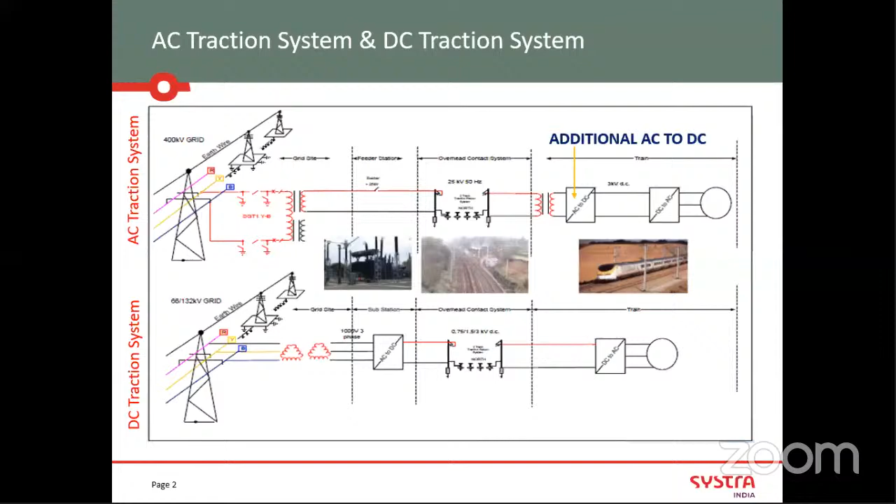There are AC traction and DC traction. In AC traction, Indian Railways uses a 25 kV AC system. And the most important thing, there will be overhead electrification. That means there will be a mast, and there will be a pantograph on the train which will be connected to that.

And there is DC traction. DC means there are certain voltage levels used by third rail, I will not go into that detail. Just for understanding, electrically there is an AC system used in Indian Railways which has to be on the mast and overhead. Over the train there will be electrification work. There will also be DC electrification, which will be at these voltages, and there will be no mast for this.

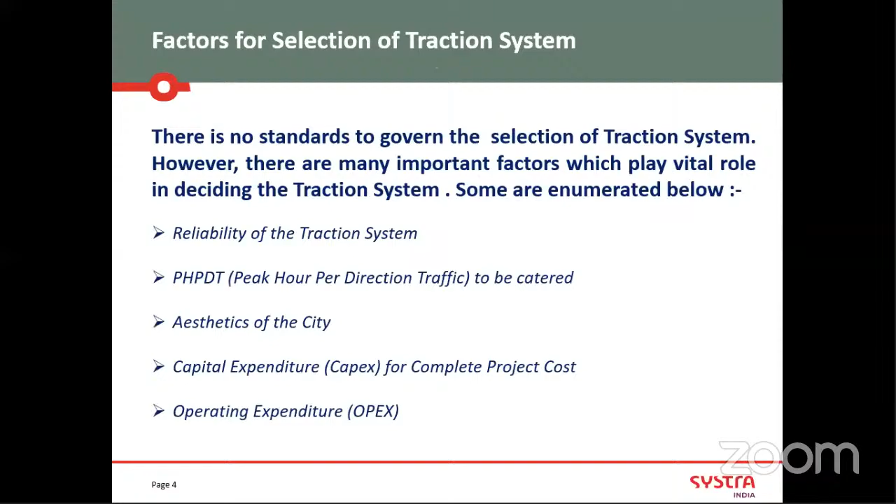At this moment I would like to share a video, made by Mumbai Metro. Let me know if it is visible... Yes, it's visible, and you're getting audio also.

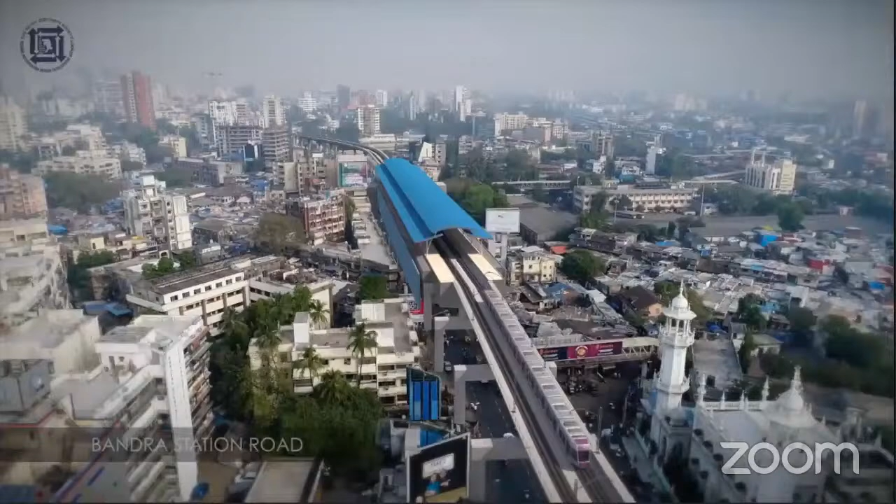I would stop here a bit. These are the kind of towers which we call mast, and there is power supply going on through them. For electrical students it's very important to know that all these things are designed by electrical people like us. What we design on paper is built and presented here. It is very good to see when we do these kinds of works, we are very happy to see it implemented in the real world.

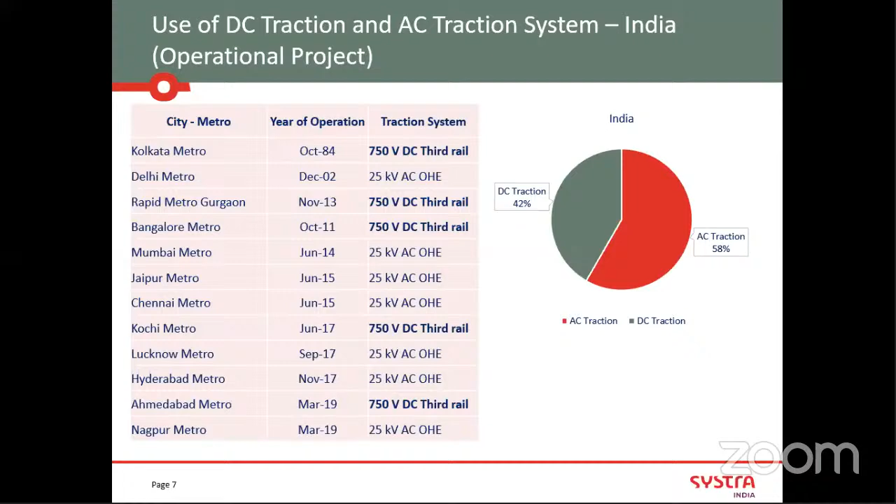Moving ahead, I will not be too technical since not everyone will be happy with that. I'll let you know what kind of work my company, Systra India, being a technical consultant, is doing. We are involved in feasibility studies - an initial study where, from the electrical engineering point of view, if given a project where a metro has to be started somewhere, we study how much power and electricity is required, how we will distribute those systems, and everything has to start from scratch.

That is as a feasibility study. Then the aspect when the system is being built, like Delhi Metro or Bangalore Metro, when the client is ready to start the works, then we do preliminary design and detailed design. Preliminary design in the sense that we do all the calculations.

If you are in 7th semester, I think, then you would have studied transmission, distribution, control, protection, earthing, and many things which really apply in the practical world. So here we go to the basics and we start from scratch, we study, we prepare. There are so many things which we can include here. So that is a part of design, where we prepare everything that is being implemented.

And one more aspect which we deal with is the detailed project report. This slide is related to the detailed project report. When we prepare the detailed project report, we study how much traffic is there in that area or how much is required. Those are technicals, let's not go there.

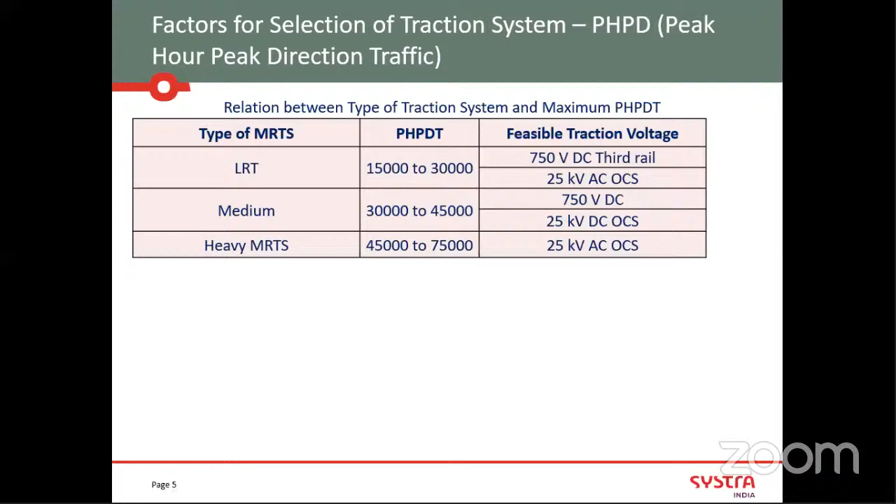So basically, before starting any project, we have to provide a project report: whether it is feasible, these many stations are going to come, these are the systems, this is the costing. So not only the technical part, sometimes we have to look into the commercial aspect of our job also. So it is a mix, best of both worlds you can say. You do technical, you do commercial, and if you are interested, you can go into the commercial part also. So there are many fields, and these are the things being done in our company.

And one more thing I would like to add: in preliminary design, we do simulation study. I think you all will be aware of ETAP, because when we were in college, we used to do ETAP projects also. Still after 10 years, I'm using ETAP with what we learned in college or what our teachers have given us. ETAP is a software which you will use after many years also, and it is very satisfying, because in college we wonder whether it will be applicable in future or not.

But let me tell you, from 10 years of experience, whatever you are learning in college, the basics will always be with you. Maybe you will be doing something else, however, the basics will be the same.

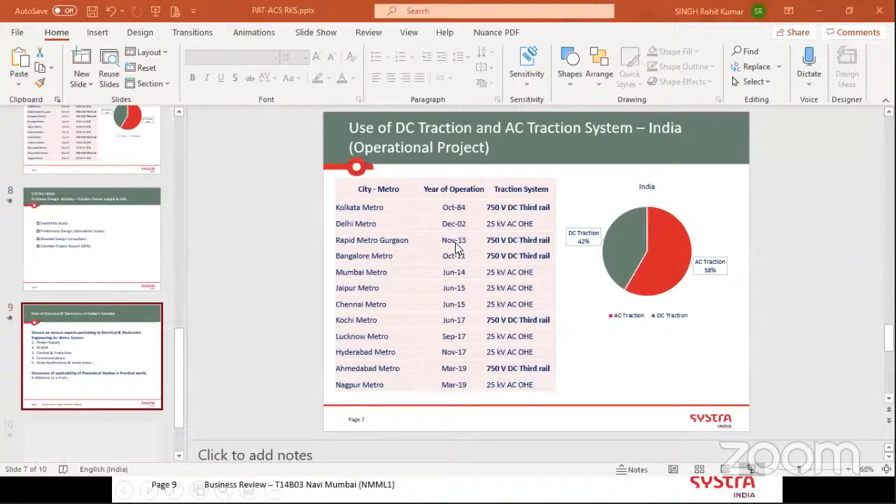So I would like to show one more video that is basically not electrical, but when I first started working in metro jobs, I was very happy to see that animation. So I will just show this video.

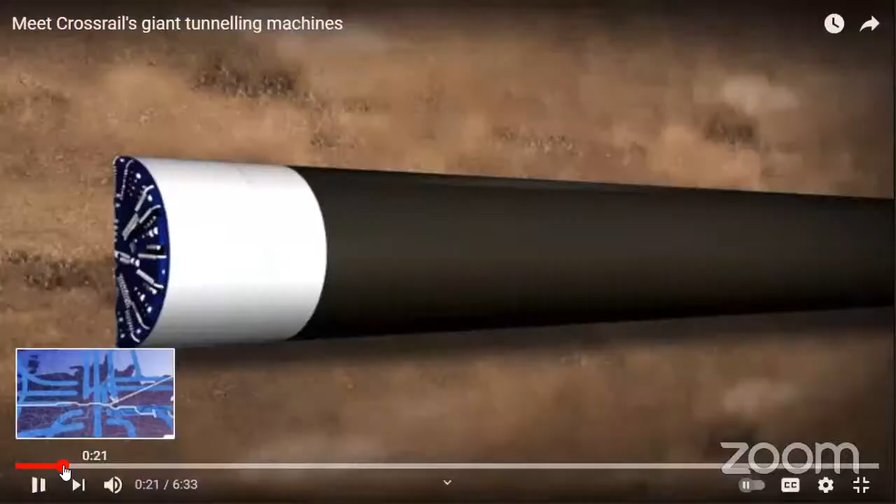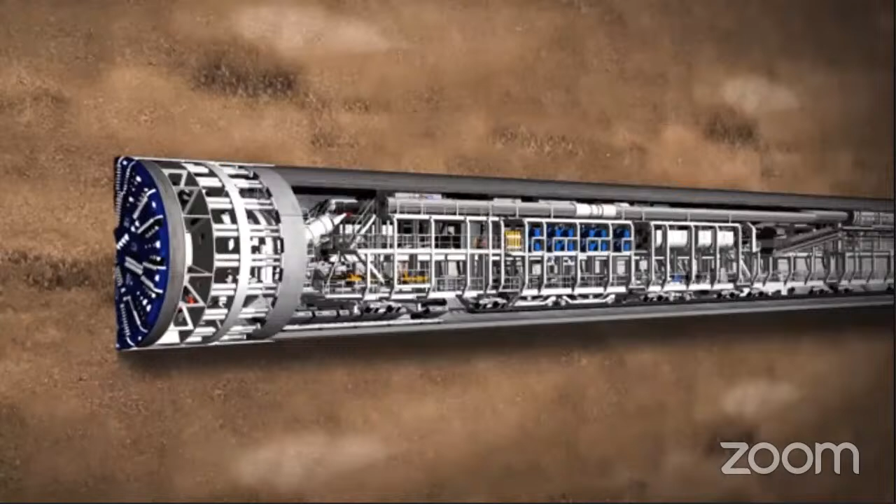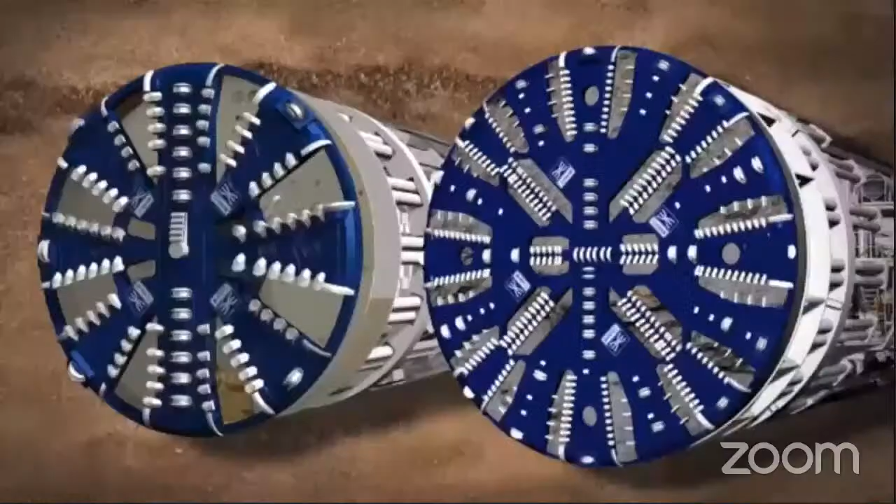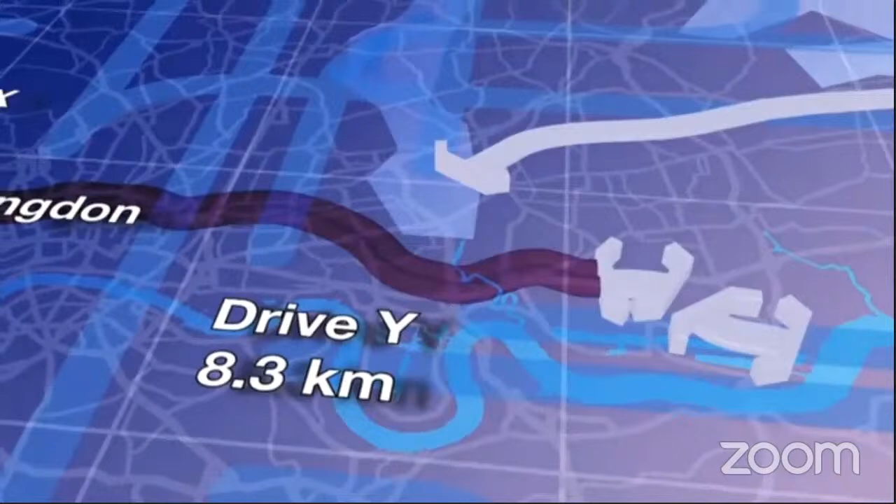When it opens in 2018, Crossrail, 8 tunnel boring machines or TBMs will drive through the ground to create Crossrail's tunnels. A TBM is 148 meters long and weighs 1,000 tons. This is the equivalent of 14 London buses end to end and a staggering 143 buses in weight. It has a rotating cutter head at the front and a series of trailers behind housing all the mechanical and electrical equipment. There are 2 types of TBM being used by Crossrail: earth pressure balanced TBMs and mixed shield TBMs. 6 earth pressure balanced machines will be used for the 18 kilometers of tunnel through the clay to the west and the riverbed deposits in the east, while 2 mixed shield machines will drive the tunnels through the chalk beneath the River Thames. Depending on the geology below and the buildings above ground, each TBM will travel between 90 and 150 meters each week, ending up within a millimeter of where it needs to be.

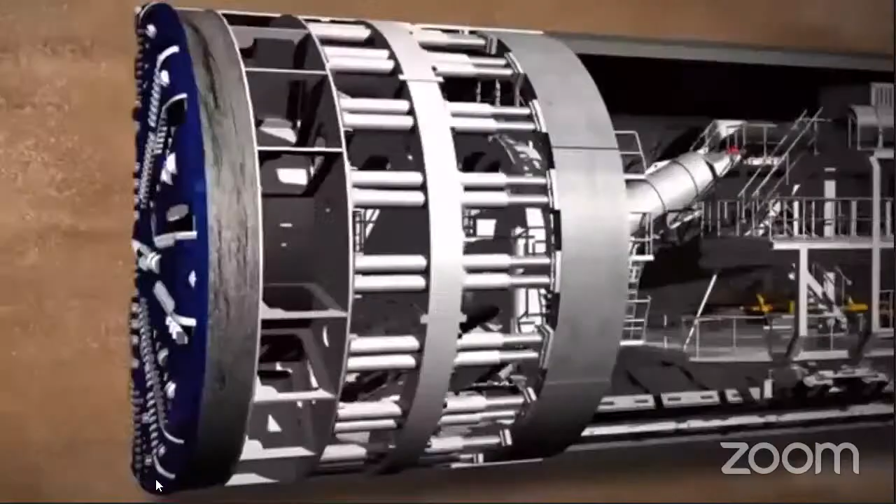Sir, audio is there, na? Yes, sir.

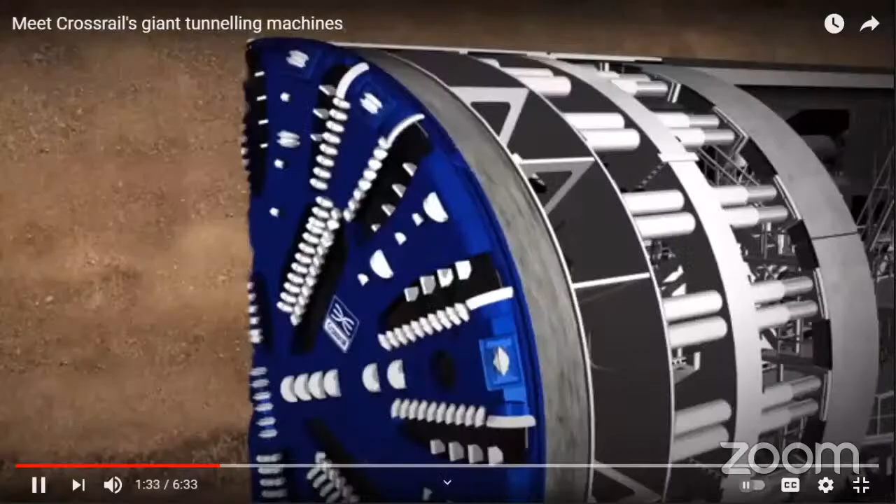The first part of the TBM's work is the tunneling phase. The earth pressure balanced TBM has a cutting wheel which is pressed against the tunnel face by hydraulic cylinders. Inside the cutting wheel, the disc cutters and scraping tool loosen the material. If the earth is unstable, to stop the tunnel face collapsing or digging too fast, the TBM uses the soil that has already been dug out by the cutting wheel to support the tunnel face.

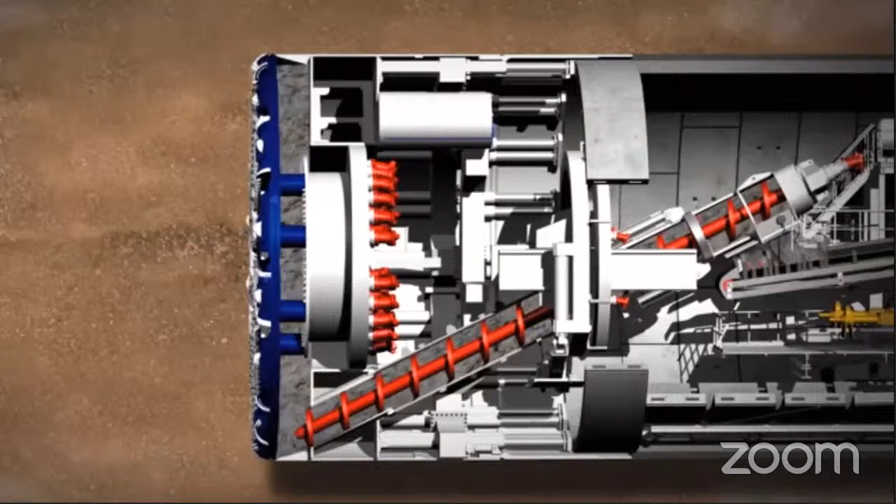This creates a stable environment for the tunneling to move forward. The tunnel face is continuously monitored by pressure sensors. They check the turning power of the cutting wheel and the screw conveyor, and they also keep track of the material that's been excavated. The material is then taken away on conveyor belts.

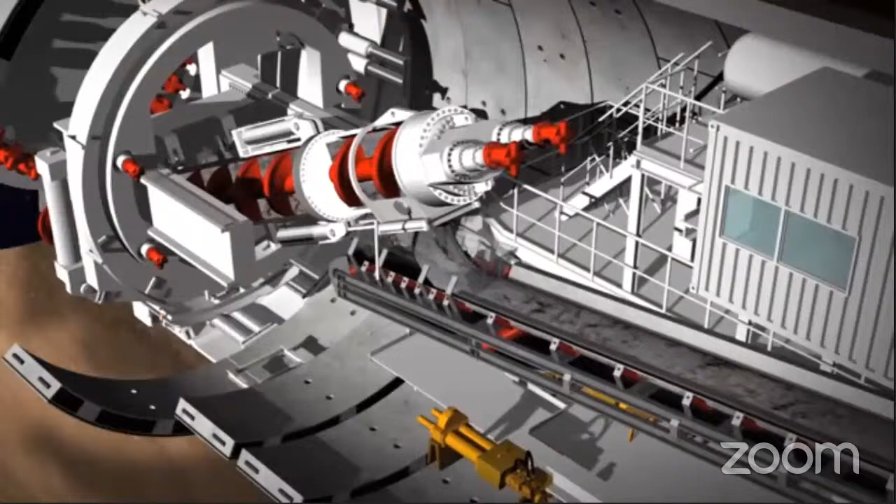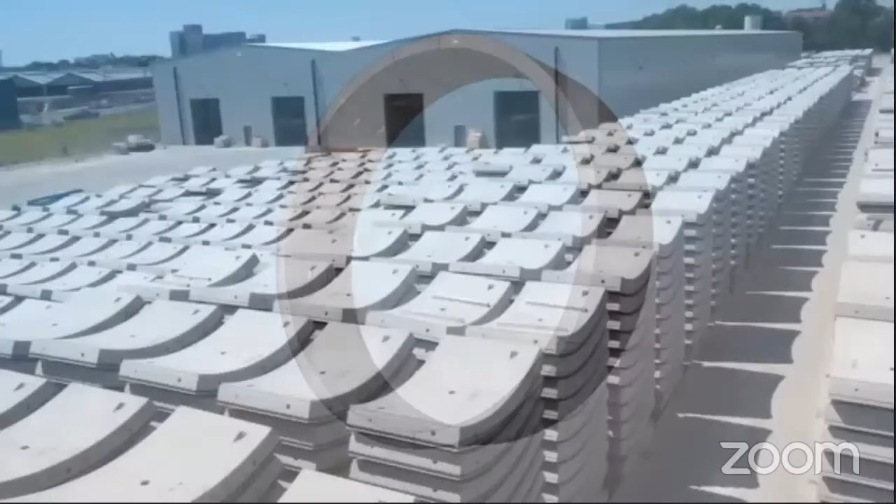Once the tunneling phase is done, the cutting wheel and screw conveyor are stopped and the ring building phase starts. A complete tunnel ring consists of several lining segments made of pre-built reinforced concrete. These are made in a special factory above ground. They must match the exact size required and are taken into the tunnel on flatbed rail cars.

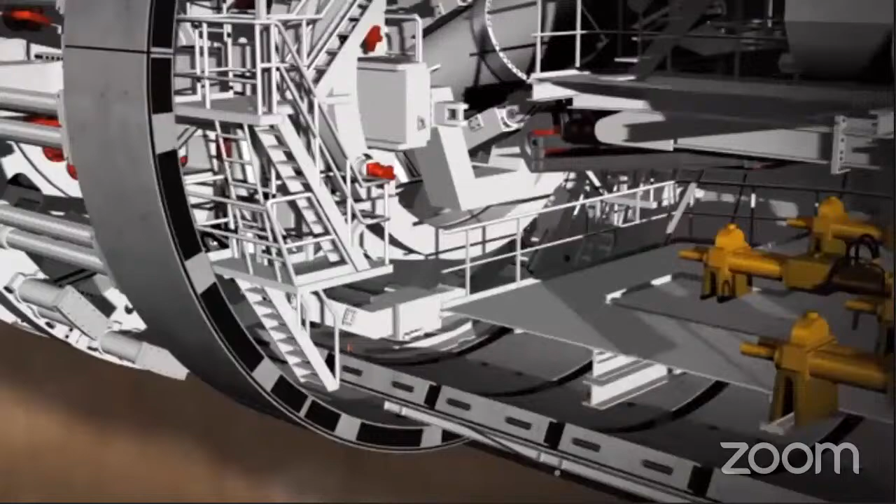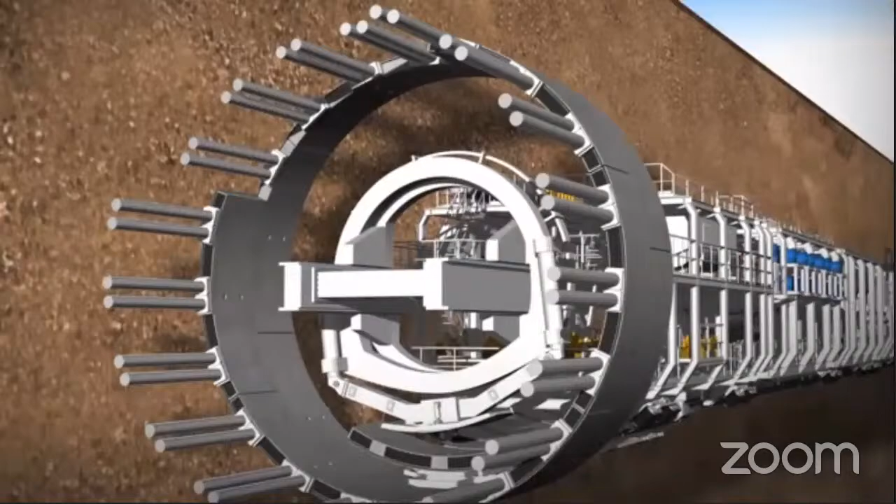The concrete segments are fed in by the segment feeder and lifted into place using a vacuum. The hydraulic cylinders are temporarily retracted in order to provide enough space for the new segment. The segments are positioned with millimeter precision and held in place by cylinders before being finally bolted into position. The conical keystone is put in from the front to complete the lining ring.

Each individual tunnel ring is built in a slightly conical form. This means that curves can be built along the tunnel route by changing the direction of the cone. The hydraulic cylinders are extended again to secure the segment into position.

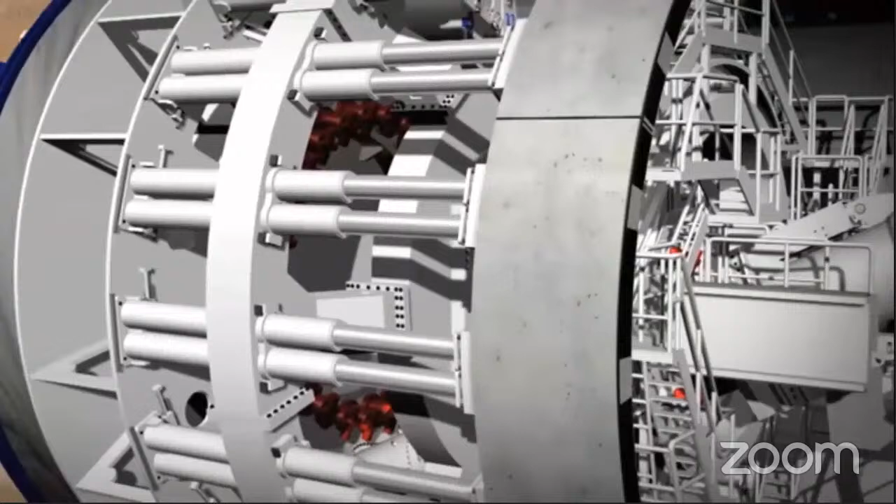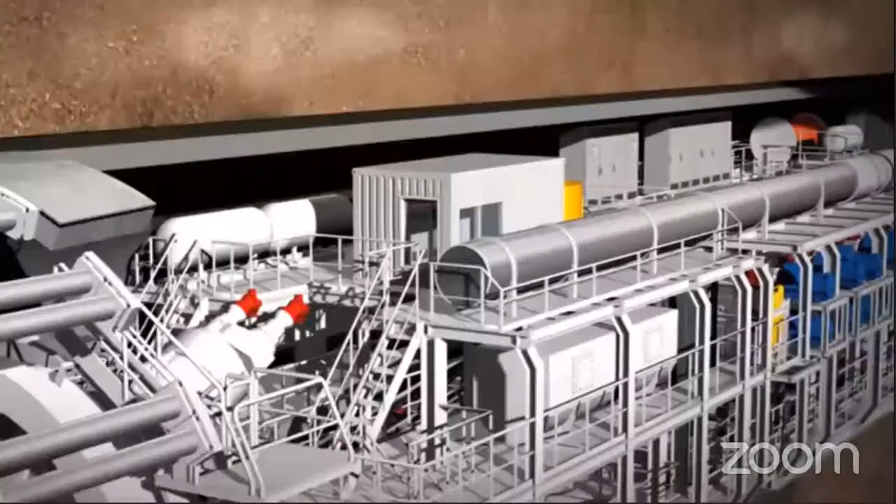During all this work, the people and machines are protected by the shield skin from the saturated ground where water is under pressure. All the readings are displayed on monitors in the central control cabin and fed back to the machine operator. Once each section of ring building is completed, the next tunneling phase can start.

The mixed shield TBMs dig in a different way to the earth pressure balanced TBM and will be used for tunneling in waterlogged conditions such as below the Thames. Mixed shield TBMs use bentonite, which is a slurry of clay and water, to support the excavation face and act as a suspension medium for excavated material.

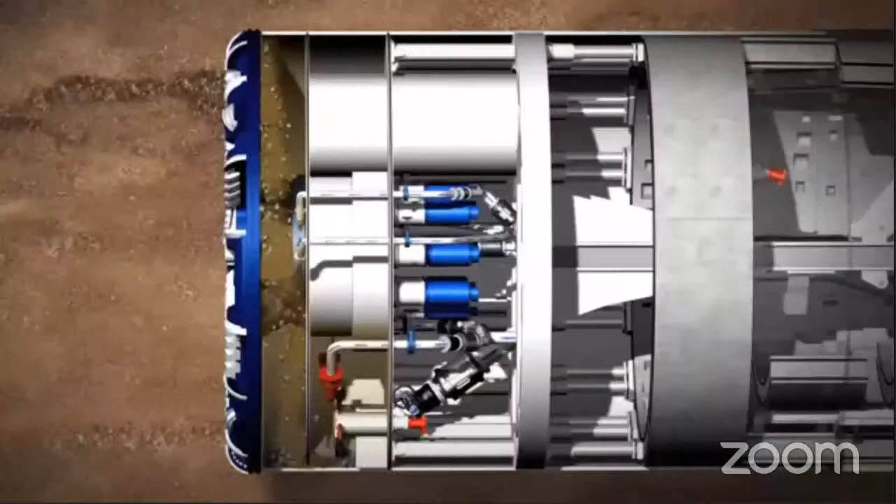The excavation chamber is behind the cutting wheel and separated by a submerged wall from the working chamber. The excavation chamber is completely filled with bentonite and the working chamber is approximately 2/3 filled. The two chambers are connected in the form of communicating pipes via an opening in the submerged wall.

A filter cake is created ahead of the cutting wheel by pressurizing the bentonite in the working chamber with compressed air. The bentonite penetrates the ground to form a membrane which holds back water. Changes in the soil can be handled by adjusting the pressurization.

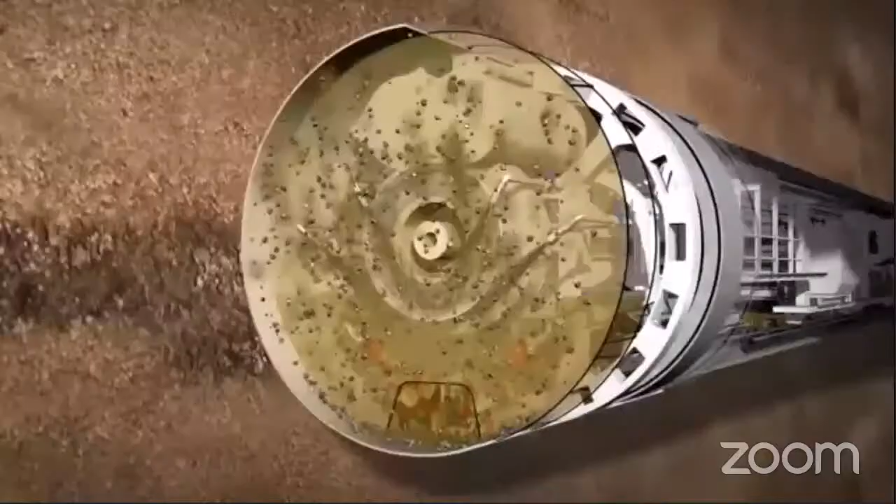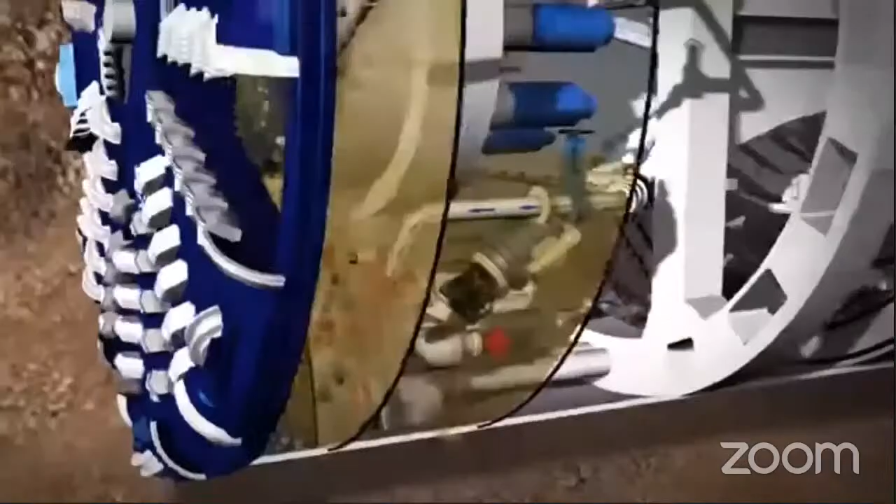The dugout material falls into the excavation chamber. Small grains are dissolved into the bentonite and bigger stones and debris fall to the bottom. Flushing nozzles guarantee smooth removal of the excavated material. The excavated material is pumped through the suction line to the separation plant at the surface.

Here, the soil is separated out and removed from the bentonite suspension through a centrifuge, and the clean suspension is transferred back into the slurry circuit. As tunneling advances, the flexible extension lines are installed to extend the lines after each thrust phase.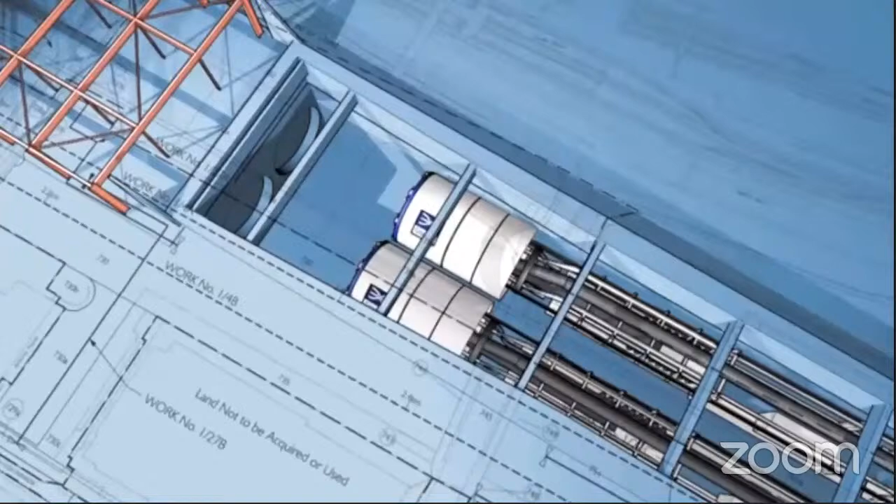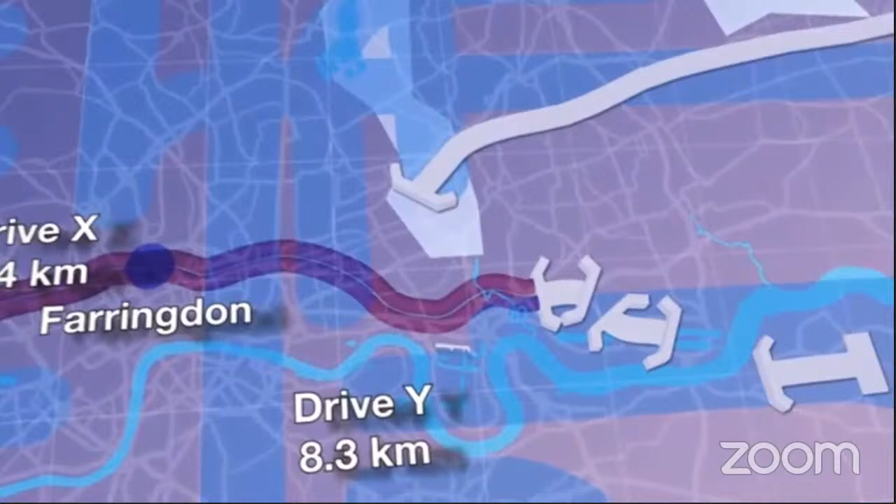Crossrail's first pair of TBMs, Phyllis and Ada, will construct Drive X, travelling from Royal Oak to Farringdon. A second pair of TBMs, Elizabeth and Victoria, will construct Drive Y, starting from Limmo in Docklands and heading under central London to Farringdon. A further two TBMs, Mary and Sophia.

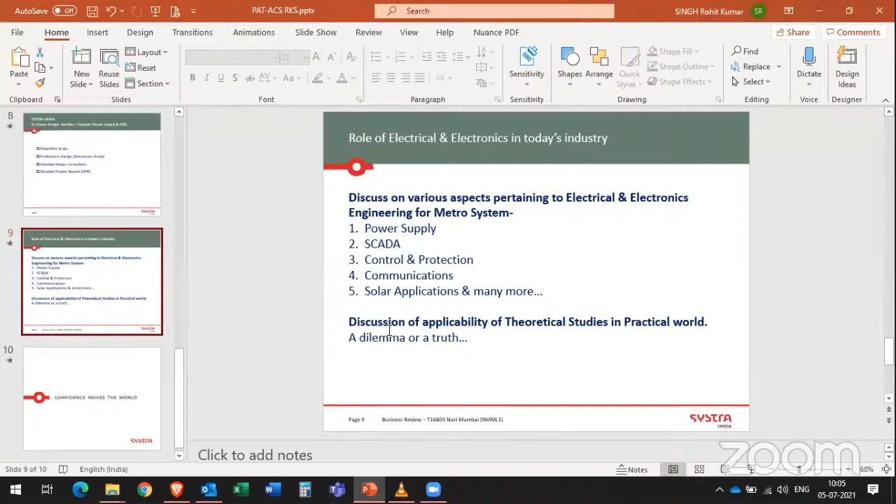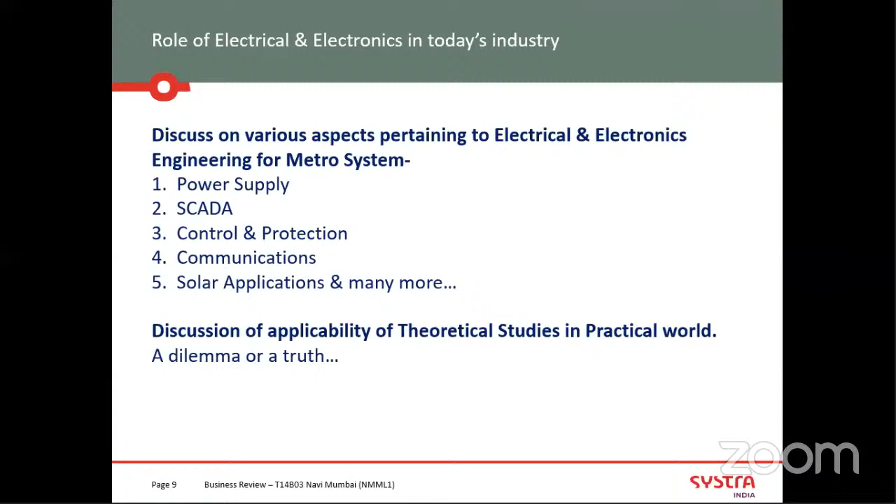So I understand that this is not related to the electrical aspect. However, it is very interesting to see what things are being employed in constructing the metro, and especially an underground metro. The one thing I would like to add here, being an electrical engineer, we think that we'll be dealing with electrical aspects only even after completing our degrees and going to work.

But the most important thing we learn here is working in a group as a team with various other aspects of engineering. Like we have to deal with civil engineering also. Over a period of time, we have to understand what civil engineering is, what things are related to it and how it will interface with electrical, because civil, electrical and mechanical, these three aspects

go hand in hand. If you are in any job, if you are doing any work related to electrical, be it any field, be it in power plants, substations, metro, or solar, anywhere you go, there will be aspects where you have to deal with these two other phases also. So over a period of time, you'll see that electrical, mechanical, civil, they complete each other.

So many a times in college, we feel, what is civil and what is mechanical, but when we work, then we understand that yes, there are many aspects that have to be dealt with. So to move ahead with our presentation, now I would like to discuss the role of electrical and electronics in today's industry.

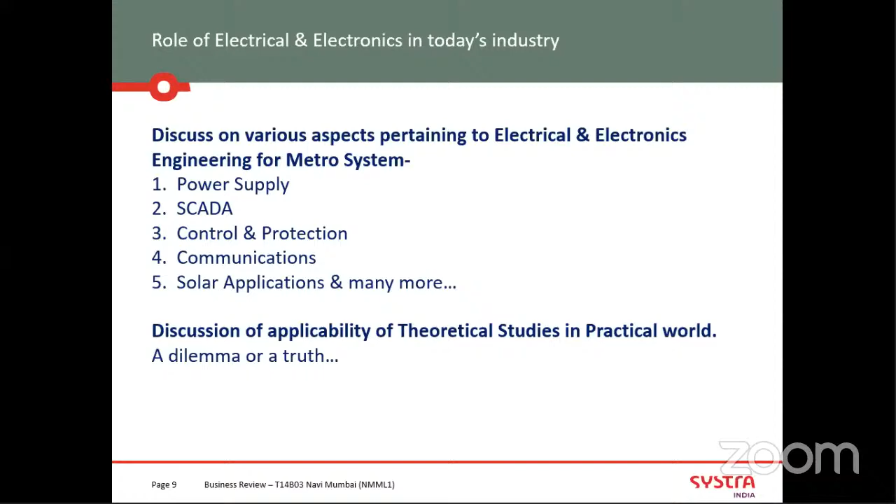Basically, more than 50% of my job is related to technical, and I do those things. So don't worry for that. Whatever you are learning there will be useful in the coming days of your working. If you are going for higher studies also, then also these things will be there. So don't worry. Don't be in that dilemma whether these things will be applicable or not. It will be 100% applicable. And as a guy with 10 years of experience, I'm saying these things. So there will be some truth in that, I would say.

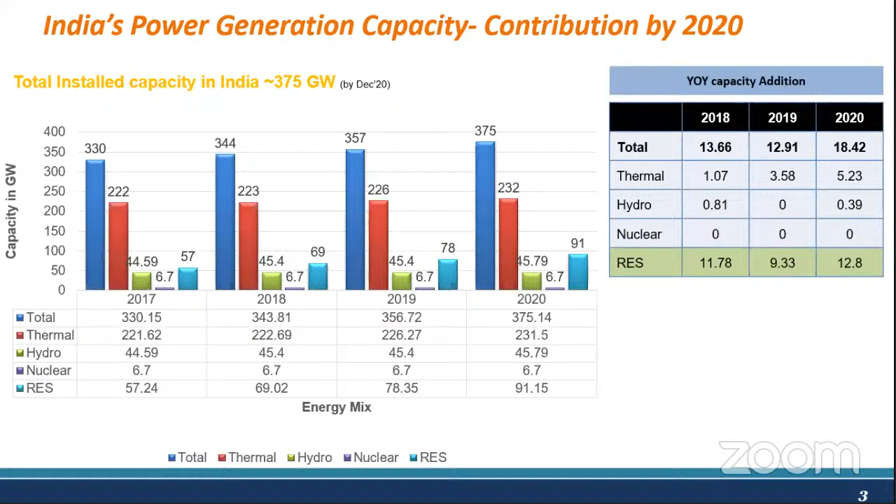By 2050, India is targeting net zero carbon emissions. So renewable energy will be a very big market, whether solar, wind, or battery energy storage. Coming to the renewable energy mix, we have solar additions of 34 gigawatt till December 2020, wind of 38 gigawatt, and other renewable sources like biomass, we have 15 gigawatt. However, in the last 4-5 years, more penetration is from solar. So solar is more preferred compared to the other sources.

Wind also has very big potential in India, but wind is highly unpredictable. So most firms are more focused on solar projects. And I will discuss more about hybrid as well, because mixing solar, wind, and battery energy storage, all three sources, makes the system viable. However, in the current scenario, solar is going to lead the market. If you see the year-on-year addition in renewable energy compared to other sources, we have more from solar energy.

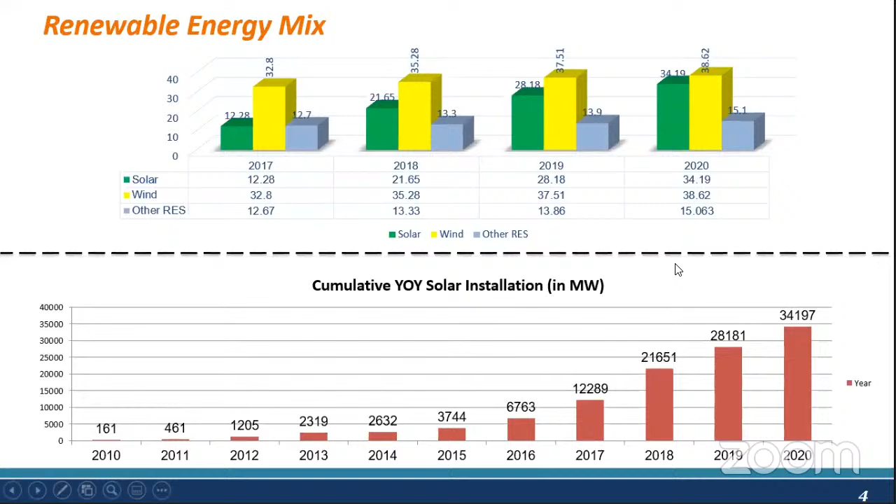If you see the total installed capacity till today, it's 34 gigawatt, and 46 gigawatt is in pipeline. India is blessed with 300 sunny days, so we have a huge potential in India.

As per the survey of the Ministry of New and Renewable Energy, India can install 748 gigawatt of renewable power using just 3% of the wasteland. Solar cannot be put on farmland, agricultural land, or commercial lands — it can only be put on wasteland. So even if India utilizes just 3% of the wasteland, we can install 748 gigawatt. This is a huge potential for India for putting up solar power plants.

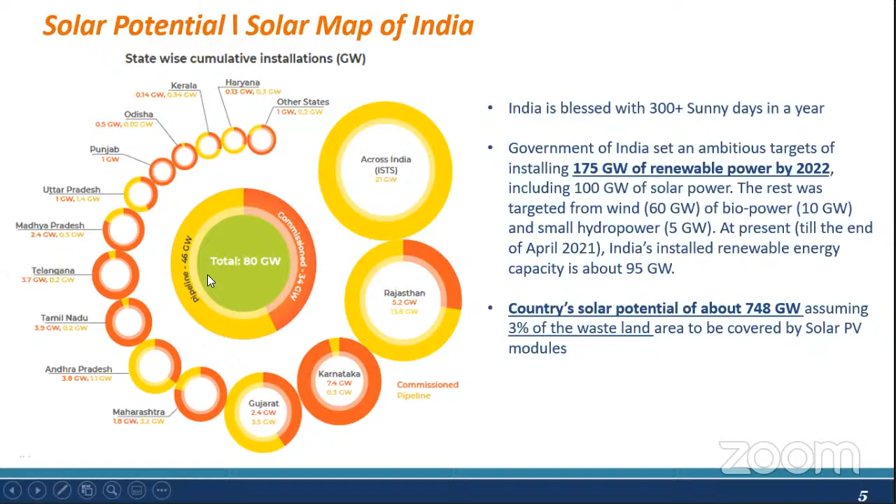So coming to this, I'm not going into detail of how the solar system is installed — you might already have some understanding of it. Just telling you that the solar system can be installed on the ground, on the roof, or on a floating system.

Ground mounted systems will be a tracker or bifacial — dual axis tracker, single axis tracker, or fixed tilt. Rooftop can be installed on any industries, big manufacturing industries, and it will be consumed in the same factory. Floating is a very upcoming market where it can be installed over a lake or a dam.

As Rohit told here, being a construction engineer, we will be doing civil, mechanical, and electrical works. So yes, it is very true that we have to be part of some civil works as well, mechanical works as well, in any of the projects.

So I was doing the civil part as well — from marking to excavation, then backfilling, and then equipment erections. You have a lot of opportunity to do all these works there, and you will be dealing with civil, mechanical, electrical works.

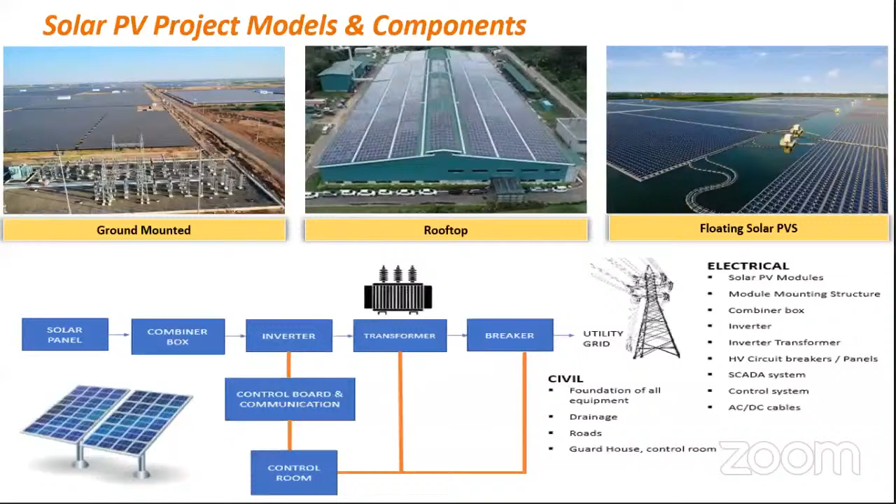So on module technology, I'm not going into detail, but yes, we have thin-film, polycrystalline, and monocrystalline modules. As of now, the preferred one is monocrystalline. The industry has completely shifted from polycrystalline to monocrystalline because of the efficiency.

We generally use mono PERC modules, since in a PERC module we have a dielectric layer which reflects the solar rays and gives more generation. Bifacial modules are used in tracker systems, where they can use direct radiation from the sun and diffused radiation from the ground or other reflecting surfaces. So in bifacial modules, used in trackers, the power generation is more compared to mono PERC.

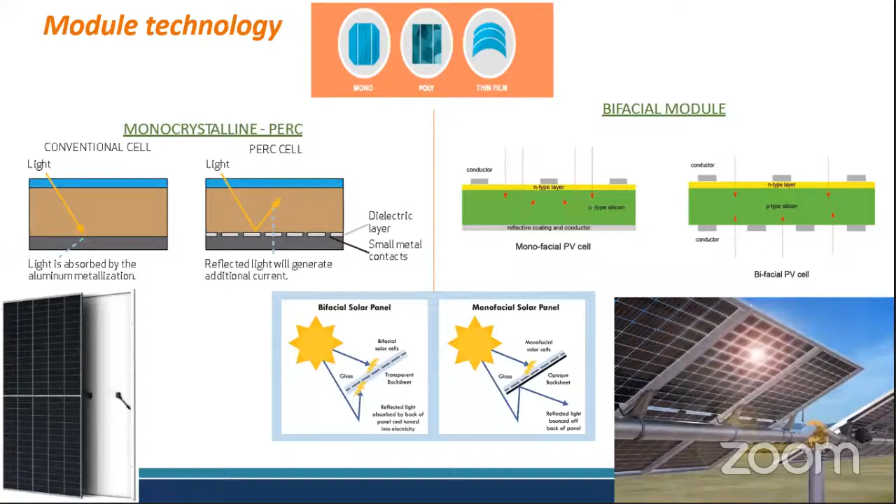Coming to the ESS market, energy storage is a new upcoming market, and India is expecting to add around 80 to 85 gigawatt hour of battery energy storage systems, mostly for energy shift applications or the EV market as well. I will tell you what energy shift is, and brief you more in detail about the use and applications of energy storage systems.

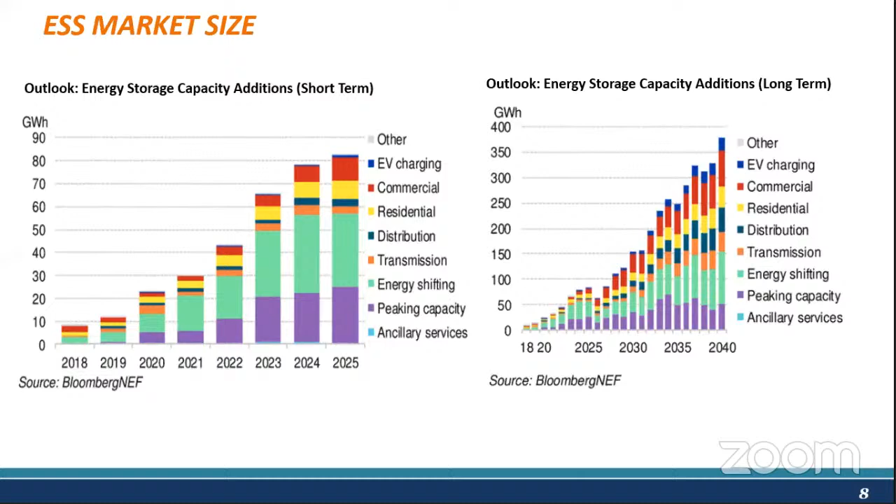By 2040, India can add around 350 plus gigawatt hour of battery energy storage systems. Coming to the technologies, you might have a few bits of information about energy storage — lithium ion is going to lead the market here.

It's expected that 50% of the applications will be from lithium ion. As of now, lead acid batteries and flywheels are more used, but since lithium ion prices are going down, the entire energy sector is shifting to lithium ion, considering the total cost of ownership, life cycles, and other technical factors for lithium ion batteries.

The output of this battery comes into a PCS, power conditioning unit, and it gets stepped up using a transformer, then goes to the grid, or may get connected to your existing solar farm or any solar farm with other applications. Inside the battery system, we have

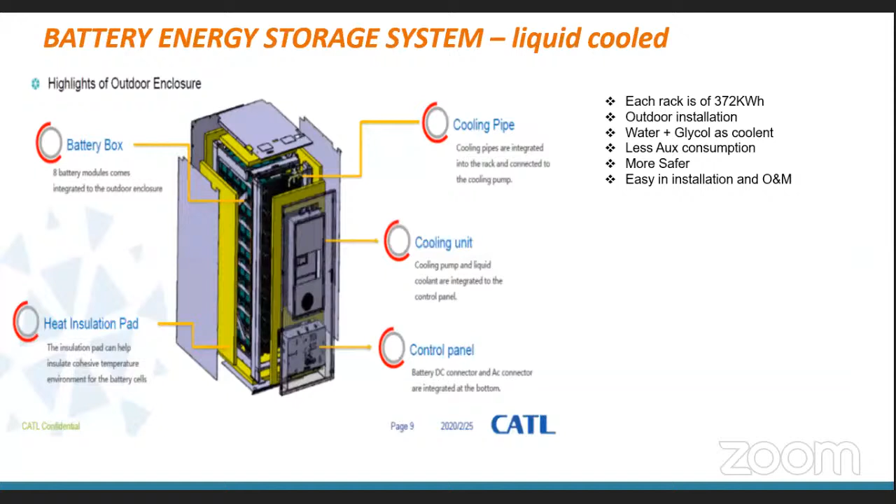It's just for one of the projects. Is my layout visible? The battery storage system liquid cooled layout is shown. No, the layout hasn't come up yet. The layout is not there. Okay, yeah, and now it is there.

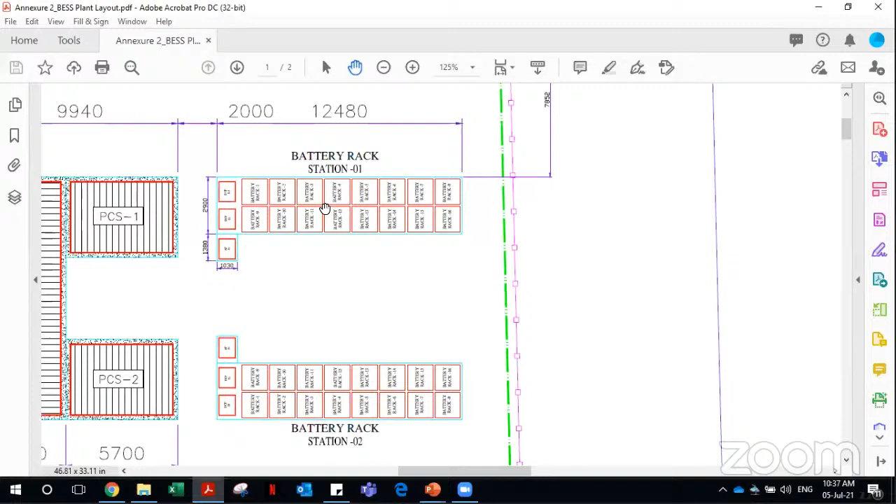So this is a concept design for a liquid cooled system where we have small battery racks. It's not a 40 feet container solution, we have small racks. This is for a 50 megawatt hour battery energy storage system. These racks' output will go and connect with the power conditioning system, and then we have twin skids.

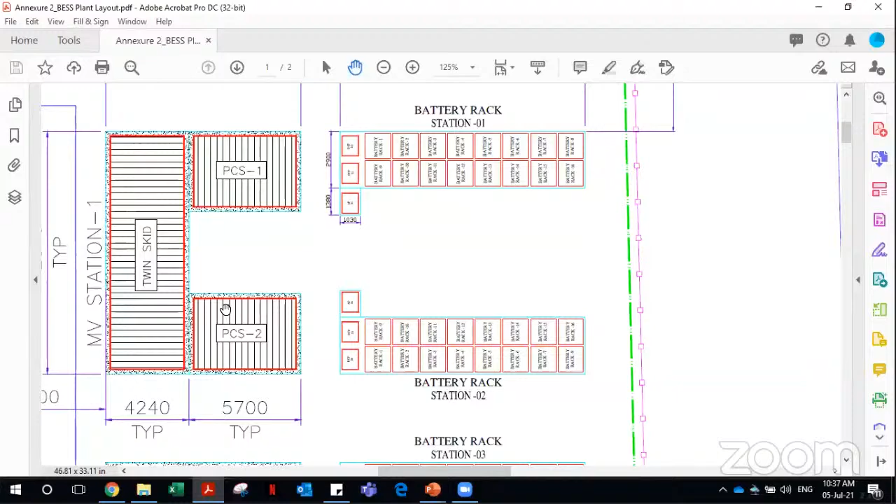As Rohit was telling, we have to keep our basic electrical concepts in line whenever dealing with any of these projects. Since you have to deal with all these equipments when sizing a system, or discussing with the vendor, or discussing with the customer, you must be aware of at least the basics needed to understand this entire system.

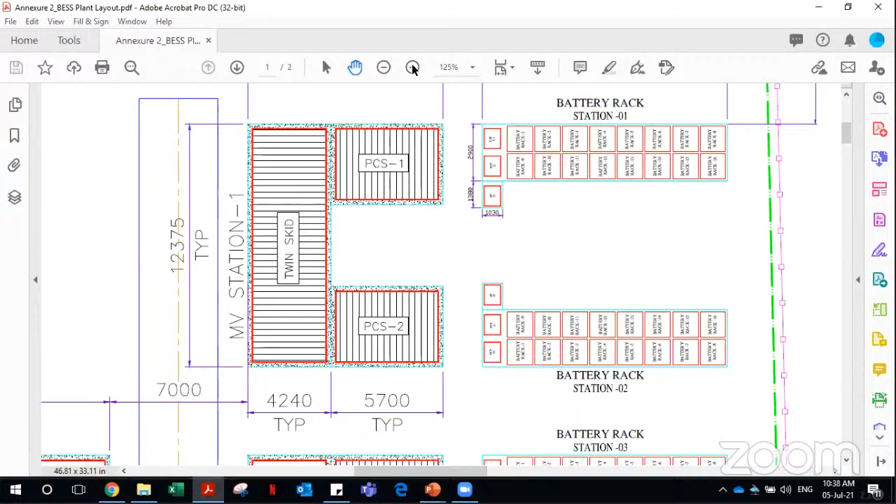So we have a complete MV skid, like a containerized transformer and HT panel, and the output of this twin skid will go and get connected with your switchyard here. This is a replica of all the systems. So we have here again a switch room, and then a switchyard connected here, which gets evacuated to the grid system.

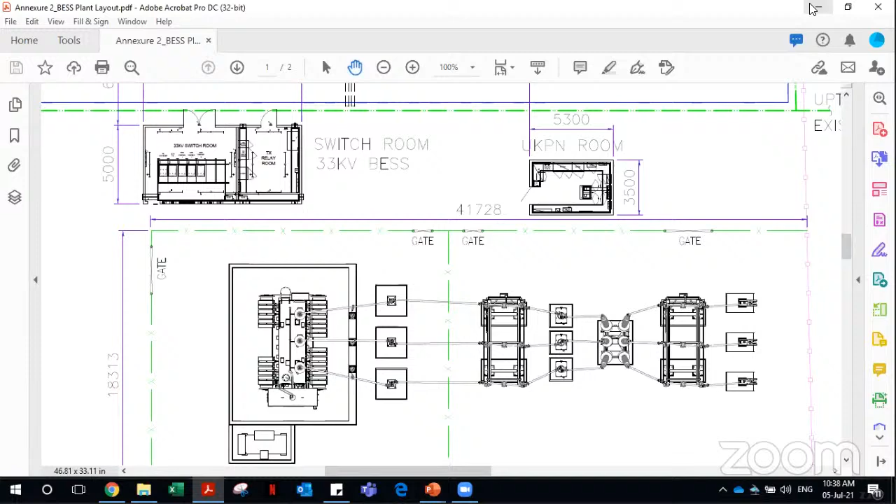And similarly for... you got my screen for... yes, battery energy storage system... yeah, air cooled, this is for the air cooled.

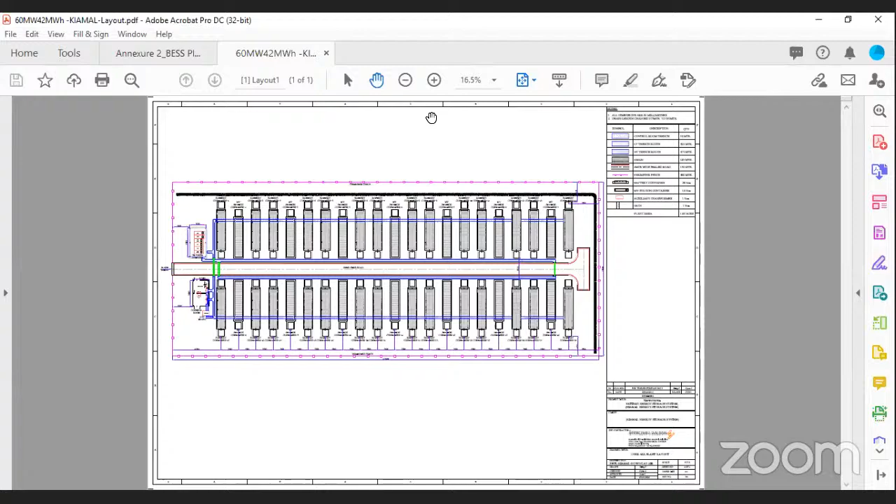This is the layout for the air cooled system, where we are putting an entire 40 feet container, and the system connects here with the HT panel, and power goes to the grid. That's the major difference: we are putting a 40 feet container, so if any incident happens, there's a chance the entire 4 or 5 megawatt hour system will blow away. So the liquid cooled system is more, you can say, safer than a 40-foot battery air cooled system.

Coming back to the presentation again.

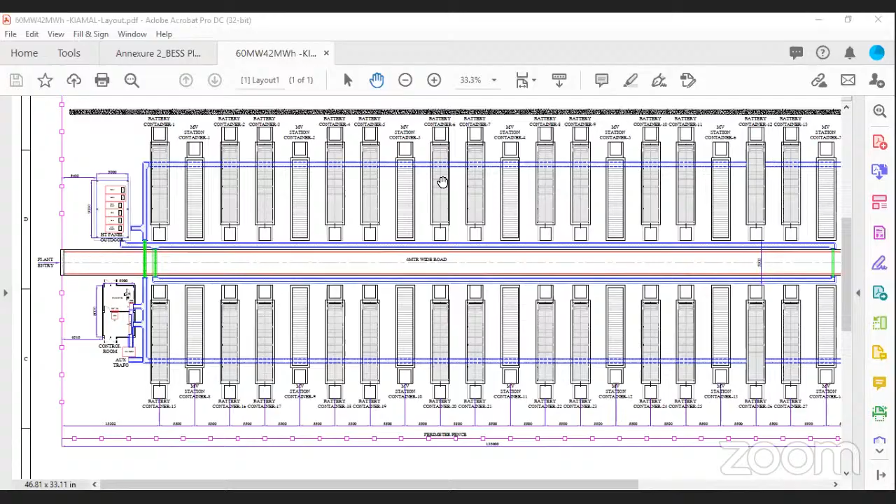So what is the functional requirement of the energy storage system? It can be used for energy shift application. This means the battery will charge in the morning, or if there is any curtailed power during the peak time, it will get stored in the battery energy storage system, and it will get injected to the grid when there is demand in the evening time.

As I was telling, wind is highly unpredictable, but putting it along with the battery energy storage system makes the system highly viable. Suppose there is a huge generation from the wind, it will get stored in the battery energy storage system, and the stored power can be used whenever it is required. So this is one of the applications.

Second application for the energy storage system is for power applications, when we need power for a 10-minute time or a 5-minute time or even for a millisecond. So it's like for arbitrage. Suppose we have high tariffs in particular durations, we can store the power, and that stored power can be fed in when there is a higher tariff compared to the other normal tariff timing.

Spinning reserve, we can use it for spinning reserve power applications when we have to keep the power for a 10 or 5-minute time. We also use energy storage systems for frequency regulation and voltage regulation.

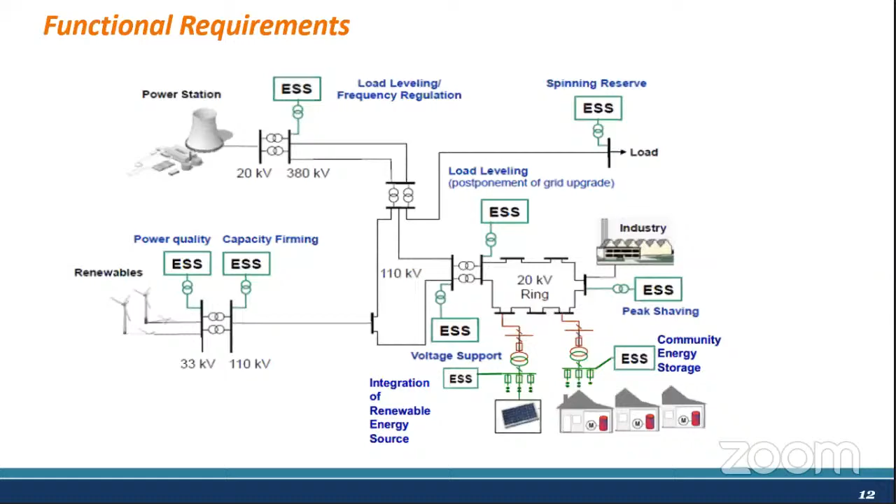Peak shaving, you can say, during the peak time, since there is huge penetration happening during the daytime from solar, we don't have that much load. So what we have to do is shut down the inverter sometimes, and in that case there will be loss of power. Instead of doing that, we integrate the solar system along with the battery energy storage system, so that whenever there is power and demand is less, it can be stored in the battery energy storage system, and it will be given to the grid during the evening time or whenever it is required. So these are the major applications in battery energy storage systems.

Coming to the hybrid system, what is a hybrid system? Hybrid means we have an energy mix of solar, wind, battery, solar, wind, or DG.

As I was telling, I'm dealing with projects globally, there are a lot of islands which are completely running on DG sets, and some financial institutes are coming up and funding those islands to install solar or wind and battery energy storage systems to cut down their carbon emissions. So there are a lot of hybrid opportunities coming up where you can put this energy mix system - you will have solar, you will have wind, you can integrate with the existing DG set, and you have a battery energy storage system.

To design such a system, we need complete understanding of the electrical system, and what you are studying as of now will really help you to design and size it correctly and precisely.

Coming to the top developers, what these major developers are - developer means who is coming up and putting the firms in renewable energy. There are tenders which come up, meaning the company is going to invest in the project and they are going to sell the tariff to the government or to the discoms. There is a particular power purchase agreement for 25 years, since the life of solar power is 25 years, and they're going to sign long-term or short-term PPA, power purchase agreement, with the government, and they sell the power.

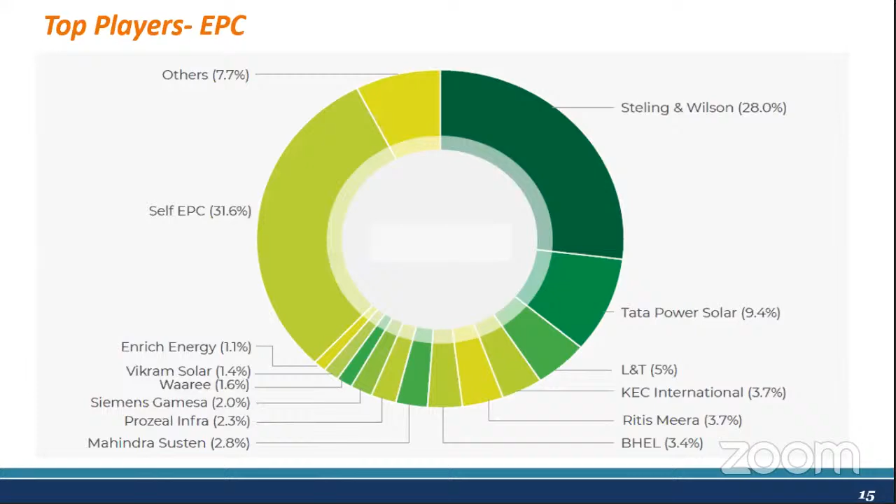So Sterling and Wilson is one of the largest EPC companies in the solar industry. Then Tata Power, L&T, KEC, BHEL is an EPC. Mahindra Susten is in solar EPC. Siemens, Vikram Solar. These are the major companies you can see in the EPC business. What an EPC does, as I told, from its inception to its completion, the EPC role is to construct the power plant and maintain the power plant.

So the first and foremost is to get the details of the site for all the required parameters for designing the systems. Then we go into the project execution. Then if there is any addition of an energy storage system, we size and design the energy storage requirement for that. Then we close all the commercial considerations. What will be the total cost of the project? What will be the operation and maintenance cost of the project? And then we give a performance guarantee for how the system will perform.

For solar, there is a performance parameter called PR guarantee. We generally give a performance ratio guarantee, that solar is going to perform at 80 to 85% PR. Then once the project gets commissioned, we hand it over and we take an O&M service from the customer, where you have to operate and maintain the power plant for the next 10, 15, or 25 years. And our design engineering team will do all the technical stuff, preparing the SLD, layout, Homer and PVsyst reports, SCADA and architectural design and all.

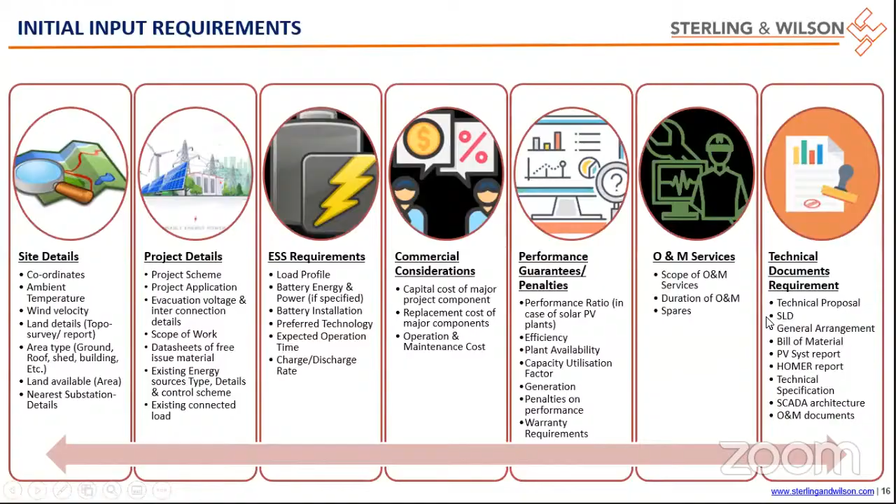So what will be your role and responsibility if you are opting for an EPC company? An EPC company will have different verticals. Verticals means they have a design team, a project team, a project management office team, a procurement team, and a sales team. So suppose you are in a design team, then you will be completely looking after the design engineering: AC, DC, mechanical, civil engineering design, and the SCADA system design. Like Rohit is completely in a design engineering consulting firm, so his role and responsibility is only design engineering there.

The project team is going to execute the project once the design is completely prepared and gone to the site. The person at site is going to execute the system as per the design. If you are in a project management team, you are going to manage the project. You are going to monitor how the project is going, and prepare daily progress reports. You are going to see what the requirement is at the site, and you are managing all the things sitting in headquarters and putting all the resources in line.

Basically, if you are in the procurement team, you are going to procure the materials required for the projects, whether it is a transformer, modules, or inverters. And if you're in the sales team, you are going to bid the tenders and estimate the tenders. So these are all the roles and responsibilities you are going to take on if you go into an EPC company. And all these functions need your basic engineering knowledge, since you have to deal with the equipment, the customer, and the vendors.